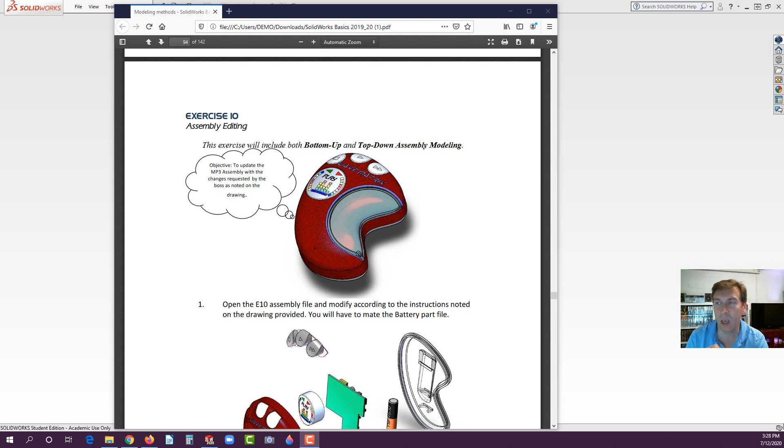All right, so we want to download this file, and where you would find it, just go ahead and go to Vertanu, V as in Victor, E-R, T as in Tom, A, N as in Nancy, U, X, and then 1.com.

And then you'll go to Part Files, and it's going to be the exercise 10 in the red column. The SolidWorks files are always in the red column. Click on exercise 10, and you hit download here.

If you're using a different browser, your download button might be up here. It depends on the browser, sometimes it gets positioned in different places. But anyhow, you want to download it. It's going to be a zip file compressed. So when it does open, you could open it with Windows Explorer, like in this case it's asking Windows Explorer. Sometimes if I'm in Google Chrome, you could just open it up inside the files there. Hit OK.

Now you have the ability to go to extract, or as I've shown you in other lessons, just select everything with Control A, hold Control and hit C to copy, and then create a new folder. Right click on Documents, New Folder. Let's get in there. There it is, New Folder. I'll click on it twice to rename it.

I'm going to label this E10. Actually, I'll drop it into my SolidWorks Basics folder because that's where I've been keeping a portfolio of things, and then just find the E10 folder. Actually, I already had one in there. You just right click on the folder and paste.

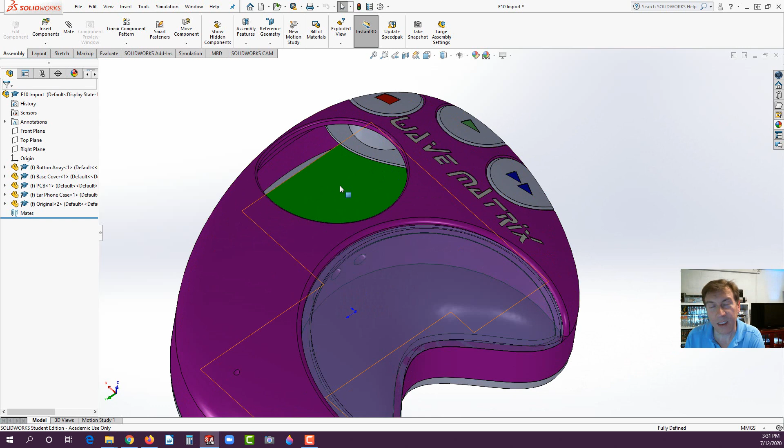Now I'm going to turn off my real view. What we see here is our MP3 player, and it's incomplete. Even though you look at it, it might seem complete, it's not. It's missing the LCD screen right here. It's also missing right here.

There's actually a hole for a post that would be in there that would create a hinge. And that hinge isn't capable just yet because we need the post, a little boss that's going to fit inside there.

Some of the other things, if we look inside, you're going to find other entities that we're going to have to address too. Now, this is actually spelled out in the training guide, so this is what you get. Now I'm going to go ahead and rotate this.

This is what we call in industry a red line and markup drawing. It's a drawing that basically goes through and the manager takes a Sharpie red marker, or a red pen, and circles areas, draws arrows, and tells you briefly what to do. So it's giving you your tasks.

Now it's up to you to funnel through those or filter through what you know you're capable of, and maybe saving the things you're not capable of for a little later on, depending upon how complex the model is. What I mean by that is what I was talking about earlier.

There's the AA battery. It just says mate a AA battery into the socket. Again, you could spend some time, interrupt your manager, say, hey, you know where that AA battery is? Do we have one on the file system? Or knowing it's a very simple part, you could just go ahead and model it up, finding one maybe sitting around somewhere in a radio or a clock, and pull it out and find a scale or calipers and measure it.

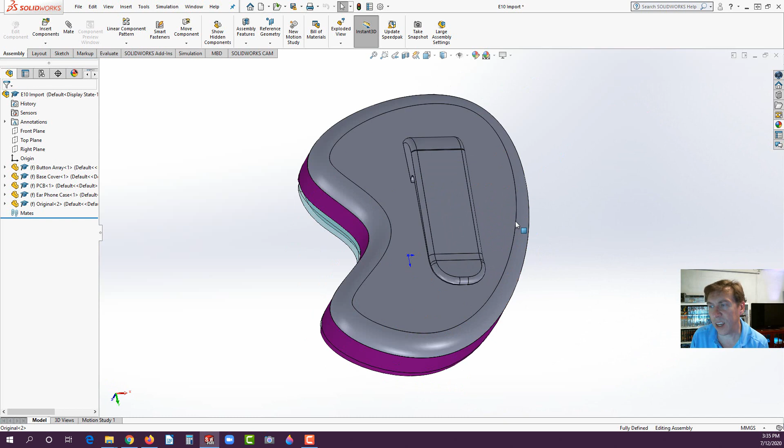Let's begin with the battery. What you want to do is rotate it around, click on this part and hide it. Now you can see there's our cradle right here, and some of the circuitry. This is not a real part, by the way, just a widget I threw together, so it wouldn't really look like this inside. It'd be much more simplistic.

Anyhow, what we're going to do is drop in the battery. If you go to Insert Component, we're going to find that E10 folder, and there should be a AA battery in there. Go ahead and open it up and get it close in proximity.

Now, this particular file has the origins turned on. That's what those blue things are. We don't really need to see those if you don't want to. Just go to View and Hide Show and turn off origins.

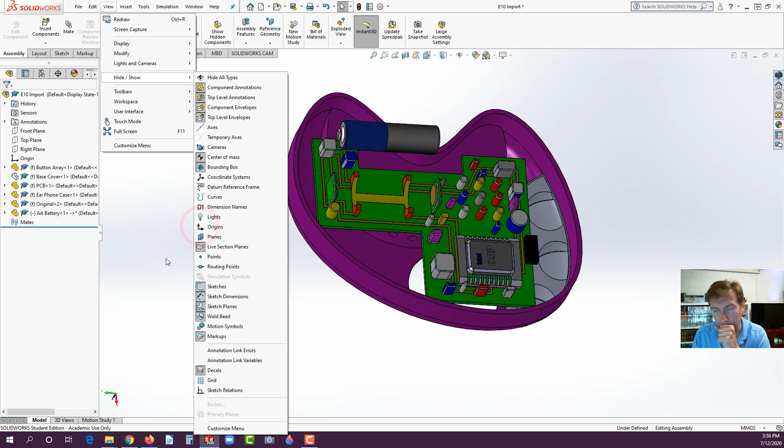Now we're going to go ahead and mate this. We've learned how to mate with the Alt key. So hold Alt, grab either this face or this face, drag it down to that yellow face there, and it should snap. Notice it's not exactly in place, but it is concentric.

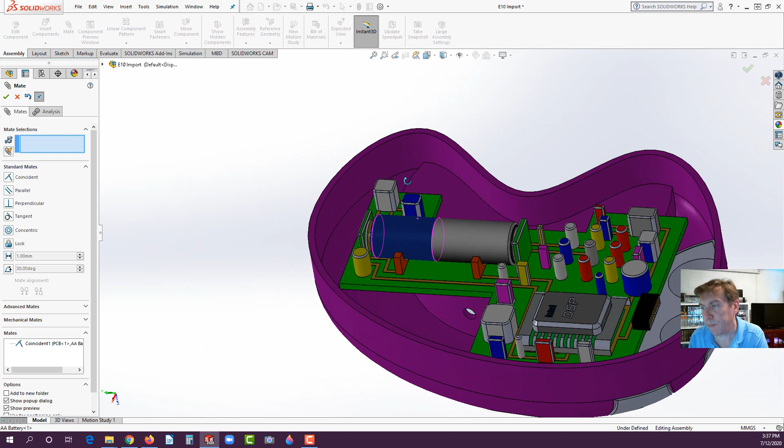Release the mouse button first, then release Alt and hit the green check. Now we want this backside face to contact the contact, so let's go to Mate. I already have that backside face selected. Go ahead and select this gold contact right here, and it should touch it. Now you could do the other side, either one's fine. So that's the battery.

Now let's flip this around and address putting in that boss. First of all, the battery—let's ask a question here. What do you think it is, bottom up or top down modeling that we just did there? We've talked about both over the past few weeks.

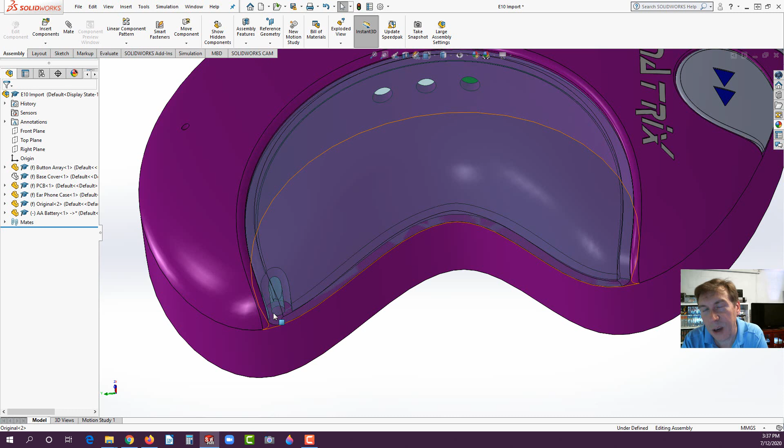If you guessed bottom up, you're correct. Bottom up is taking parts that are already existing and just dropping them in. So library parts, like nuts, bolts, washers—those are also library parts. So that would be bottom up modeling.

Now here's what we're going to be editing this part. This is really part editing inside the context of the assembly, but at the same time it is assembly modeling because we're going to base the location of our post centered on that hole so that it fits perfectly.

So here's what I want you to do. Now what we have to do is click on the purple part, and you want to go to Edit Part. You always have to do this, and we've learned that from exercise 9. So click on Edit Part, and now we're editing the purple part.

One defining entity is that the part you're editing on the feature tree always turns out the text in blue. So just be prepared to look for that. You can see it's called the original here, that is the front cover, and it's in blue. That's an indicator that that's the part we're editing.

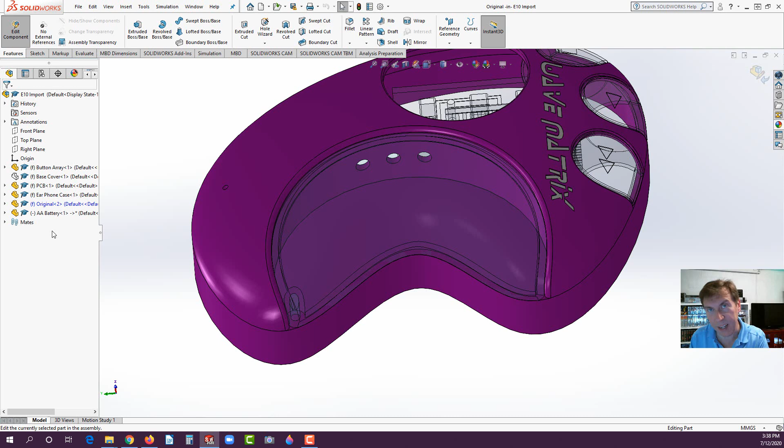All the other parts are not being edited, but we could steal information from them still. So let's go ahead and notice you can select through the part that's over it because it's transparent. Now start a sketch. Here, unfortunately, we can't select through it very easily.

So let's hit our space bar and go to the front view orientation, or just so it's aligned here, let's go to front, Control 1. Zoom up to that region, and now let's go to either wireframe or hidden lines visible. I like hidden lines visible. Now we can actually see that area there, and you're able to snap to it.

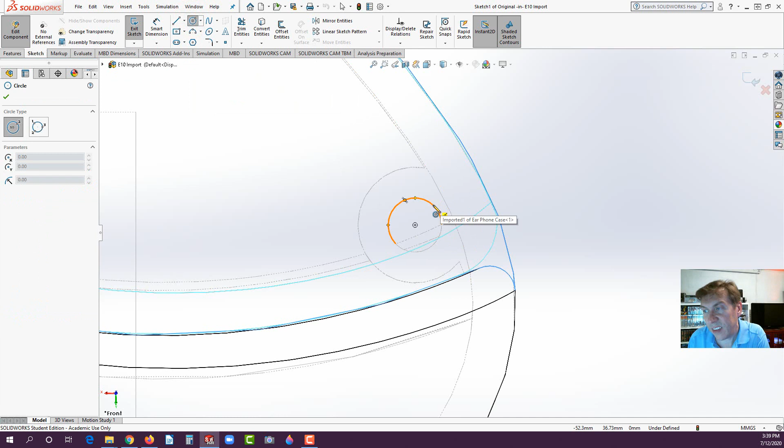So go to the circle tool and align to this. I'll hover over the edge, and then it locates the center. Click and drag out a smaller circle, and you'll notice we're in metric for this one. So go to Smart Dimension, and that's not a problem. In fact, when we add our dimensions, you'll see that it's ISO.

So technically, this assembly was not in the ANSI standard, which isn't a big deal. I'm going to show you some neat things. First of all, you could click over here to drop that.

If we're not sure, but we know what it's supposed to be for inches and not metric, you could type in what you know. So for example, 0.120, and hit the green check mark. Now it was supposed to be 120 thousandths of an inch, and you can see it's much smaller.

Double click on that again. Let's do something different: 0.120 IN, type in I for inches, N, hit enter. And it converted it to 3.05. So be aware that just typing IN, or even just the quote at the end, will actually convert it for you if you're in that specific units, the other units I should say.

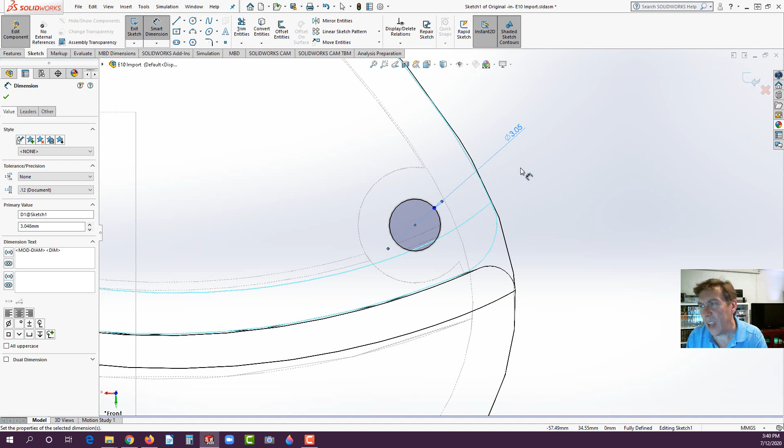Now at any time you could go over here where it says MMGS, click on it, and you could go to IPS. We don't want to do that, but we could, and it will convert over just fine.

Now be aware, those of you who worked on older systems had a tendency to rescale them. They actually come out to a different scale, and then you have to scale them yourself. SolidWorks actually does the conversion. So when you change it over, just like when we plugged in the number, it'll automatically make it the proper size. There's no scaling involved, so just be aware of that.

Okay, now we could go back to shaded with edges and rotate this a little bit, and let's go to Features, Extrude Boss Base. Now let's say 5 millimeters here, and we can see there's a bit of an intersection. That's okay. Technically, this would be designed better.

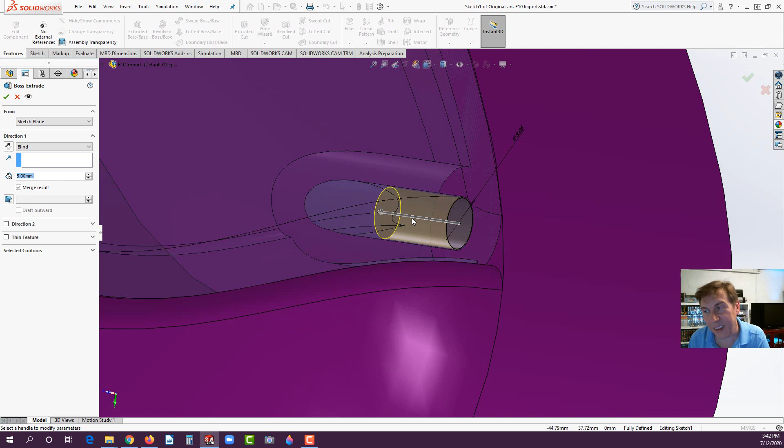It wouldn't have that strange little thing. The molding company would actually put a core pin that doesn't have that detail in there if you ask them to. So let's just pretend that squiggly area is not there. Hit the green check, and there it is.

We've just added a new post. Now when you're done, you have to turn off Edit Component. So make sure you go over here to Edit Component, turn it off, and it's no longer being edited.

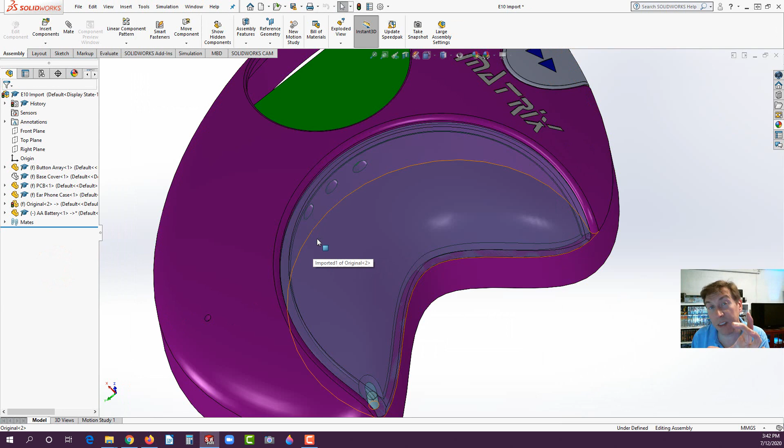All right, let's look at our instructions from our manager. So we've taken care of the AA battery. We've created the boss. Now let's hit the LCD screen. For the LCD screen, it needs to be roughly the same size as that opening, and it's going to be from the floor of the PC board, that green board there, and it needs to follow the contour of this purple exterior.

So to do this, here's what I want you to do: get it to where you can see inside there, rotate it similar to mine if you can. And now, underneath Insert Component, hit the little arrow and go to New Part. So here we are at Top-Down Assembly Modeling. Select New Part, click on the circuit board because it's flat - we can sketch on it.

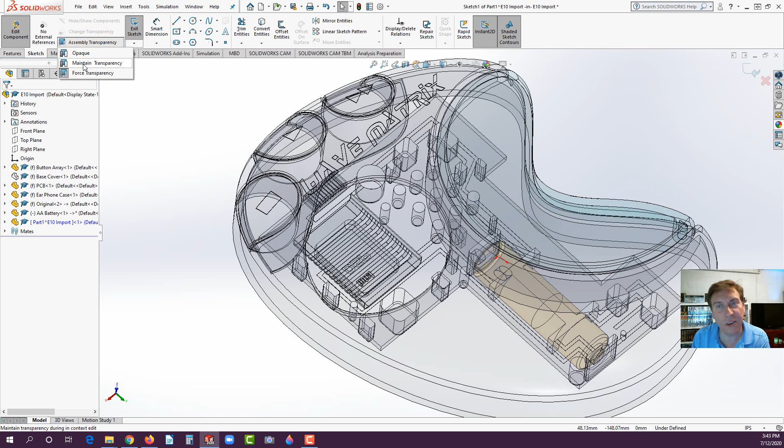And now it goes to this transparent mode, which when you're more fluent with the system, it's not so bad. But for new users, especially in the basics class, let's go to Assembly Transparency and turn on Maintain Transparency. Then rotate a little bit or zoom in and out for a quick second - it'll refresh the screen.

You'll notice there's an opaque assembly, and you're saying, well, why don't we use that opaque assembly that's over here? The reason I chose Maintain Assembly Transparency is because it's the best of both worlds. Notice right here, I'm able to keep this cover transparent, and everything else is opaque, i.e. solid, you can't see through it. If we went to that other option, it makes everything opaque, so you can't see through anything. So this is just kind of a nice little feature.

All right, now what we're going to do here is we want to create this part similar to how these parts were created, not in the context of the assembly - well, in the context of the assembly, but not integrated into it. We want to rename it, in other words.

Now, while the part is being edited, let's go to File, go to Save As, and it's just going to give a little message here. You could read it if you like, but watch this. Hit OK. And we're going to call it the LCD.

Let's copy over the old LCD. Or you could call it LCD1 if you want to keep that other one there. Hit Save - I'm going to replace it, yes. And notice it's now listed as LCD.

All right, so we changed it, and now that's a part floating outside of the assembly because we saved it like that. We did a Save As. Remember, we had to be in Edit Component in order to do that per part. So that could be a solution for some of you if you're wanting to change out parts, or add parts to it.

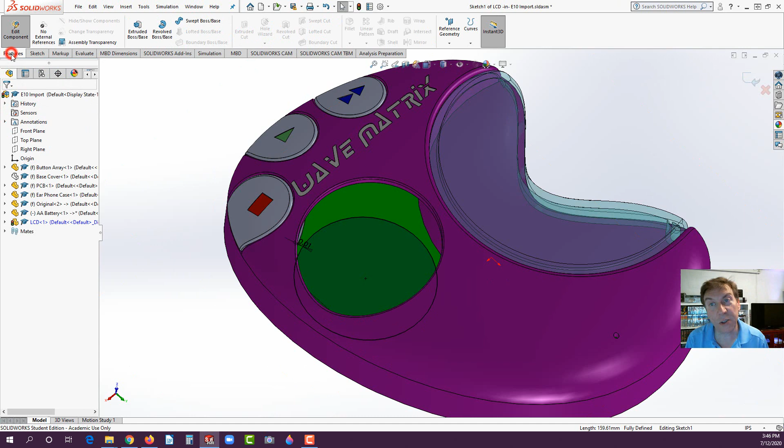Now let's go to Features and Extruded Boss Base. If you were to extrude this by grabbing the arrow and using the ruler, you'll see the preview shows it's not following the contour of the purple outside surface. We want this to be nice and smooth so if it brushes up against anything it doesn't get caught, and if you put it in your pocket it doesn't feel weird.

So now instead of blind, hit this little arrow to the right of blind and select up to surface. Now you just select the surface you want it to go up to right here, and you'll see it will actually show you a contoured surface that it's matched. Go ahead and hit the green check.

Let's put a fillet around that edge. So go to the fillet tool - or better yet, actually cancel, let's put a chamfer. Now when it comes to aesthetics of a model, a chamfer versus a fillet - if you're dealing with aesthetics, chamfers cast a greater shadow on something. It's kind of like actors - if you look at them up close versus when a play is being done, they put a lot of makeup on so you could see them from a distance, and a chamfer can kind of do that. Versus a fillet doesn't cast as great of a shadow. So just from a standpoint of industrial design, we'll go with chamfer in this case, and it's just a matter of taste.

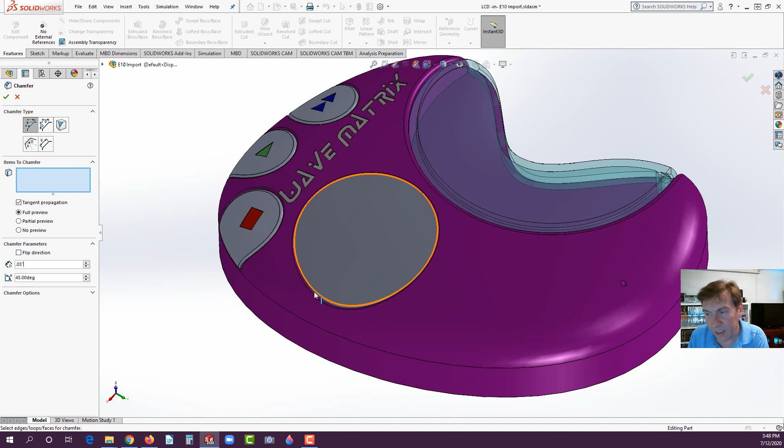Let's go ahead and set it to 0.03, and then inches. This time put the quote in just for the heck of it - the little quote, which is right next to the enter key, shift, and the little button to the left of the enter key. And select this edge, and you'll see the little break in the chamfer. Actually, in here you'll see it's 0.03. Let's increase that to 0.06.

Now here's what's interesting, and I just realized with the new part that I added - because of the way my computer system's set up, or my SolidWorks is set up, we're in inches now. Remember, we were just in metric. That's because the assembly, the imported models, were all set up in ISO standard and in metric, MMGS. New parts, it's not inclusive. If your system's set up for something different, you're going to get the opposite. And that's okay here - in this case, if we knew what it was in metric, we could type in something like 0.0 blah blah mm for millimeters, or 1 or 2 millimeters.

Okay, so hit the green check, and then we have our chamfer on there. Okay, let's turn off editing that component, so don't forget to turn that off.

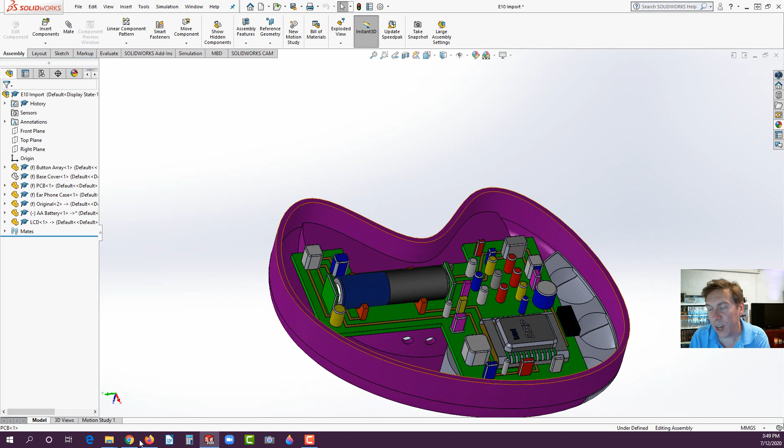All right, now we're getting here. The next thing is to work on that rear cover. So we need to bring that back. Find the base cover, click on it, and click on the big eyeball to show component.

Let's hide the purple part. Click on the purple part now and click on the eyeball with the line through it to hide it. We'll leave these other parts in here and work around them.

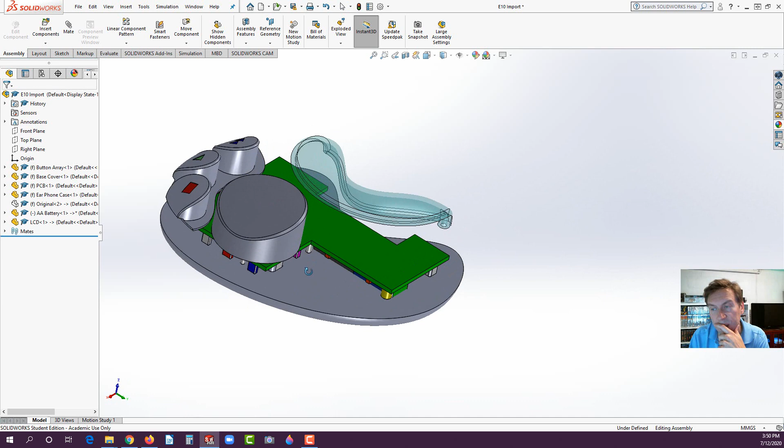For this next one, let's go ahead and select this face. And we want to go to Edit Part, letting SolidWorks know, hey, we're checking this part out. Let's work on it. So click on it.

The first thing the boss asked us to do was to put in a wall here, or a thin wall, and it's 100 thousandths shell, so 0.1. Now we have to make sure down in the lower right, you'll see it's in MMGS. If you like, we could hit the little arrow and change it to IPS.

Now when we go to our shell tool, sometimes you'll see, because the assembly is still in metric, this is only adjusting the part we're editing. So we've converted that part to inches, but the assembly is still in metric. And so you might see a discombobulation - you might have the two systems. At some point you might see metric, at some point you might see inches, just like we saw earlier.

But let's see what it gives us. Go to shell, and we're in inches. Okay, and 0.1 is what we want. Click on this face and hit the green check.

Now here you get a message, and this is actually common: the thickness value is greater than the minimum radius of curvature. The shell may succeed, but could cause undesirable results such as bad geometry. It's basically saying it's probably going to work, but there might be bad geometry.

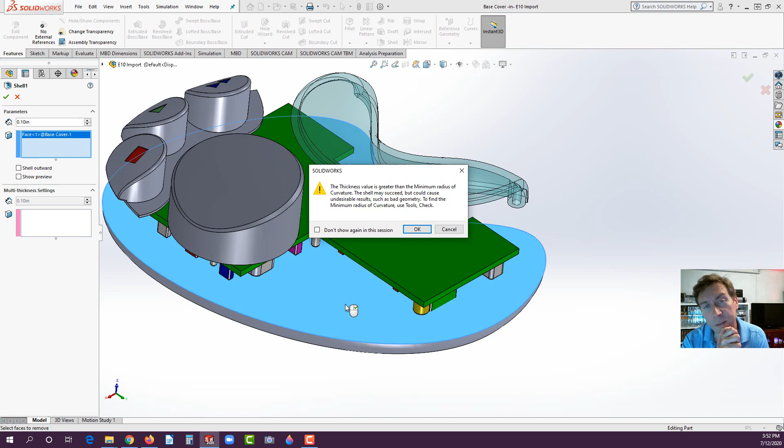I used to get these a lot when I worked in industry. I worked in the mold industry for a little bit, and actually the prototyping industry, so I have a bit of experience in this field. But if we could fix it, that would be much better. So let's go ahead and just hit OK and let it do its job.

But let's take this out of the assembly so we could look at it without all this stuff around it. What you can do for that is right-click on the actual part, either in the feature tree or right here. In the quick launch toolbars, the very first tool will be Open Part. Go ahead and select it.

Now you might get this message: do you want to proceed with feature recognition? This is because this will usually happen if it's an imported model that may not be native to the software. We're going to hit no.

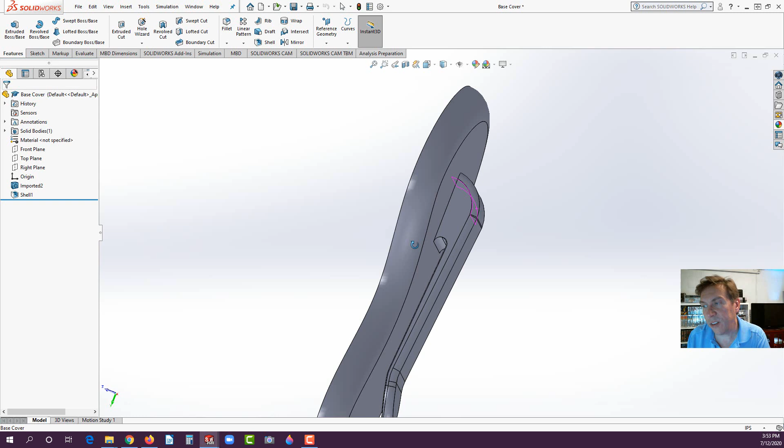All right, and so we could see here, now there are tools for checking them and things like that. If we go to imported, since it has a shell, we can't do it unfortunately. But if we left pre-shell, there's actually a little toolbox that allows us to work on it. There are other tools that we could look at it, but I'll tell you right now, usually the part looks actually quite good - look for entities like this.

So what we have here, if we select that side face, when we shelled this out, the belt hook had an issue. This has some series of fillets, and the minimum radius curvature was lost, maybe perhaps even at this point. And so it might create bad geometry for mold making.

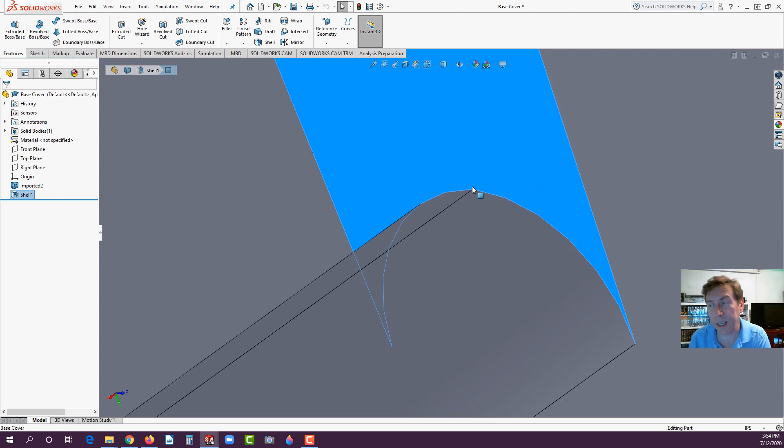And in fact, actually, it's bad geometry for mold making anyhow, because it's an undercut. Mold, typically the most basic of molds are two-part - they have one half here, and they split. And notice this hooks over - the mold couldn't split very easily there.

Now, there are ways of getting around that if you have to have it like that, but clearly we don't need it like that. Meaning, we could basically fill it in if we wanted to.

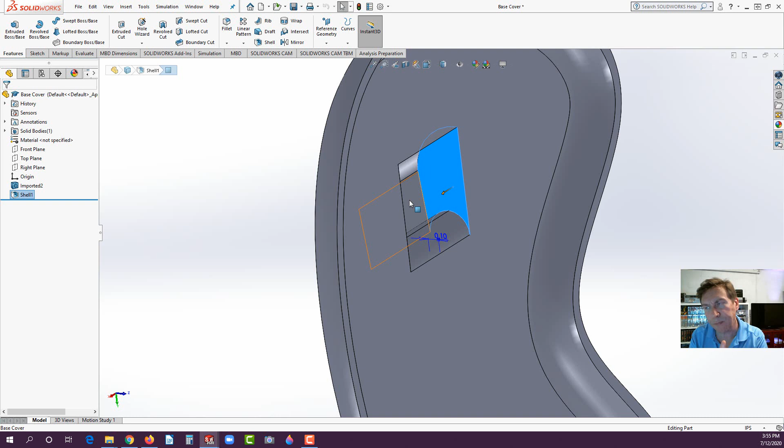However, filling it in isn't always a good thing either, because when you fill in - and now we're talking about plastics engineering and design - that thick of a piece of plastic, you'll get sink marks. It'll actually sink in because it solidifies, and the more material that you have, it sinks in even worse. You might not want that. We don't want the part to be warped because it's sinking in. So you want to keep what they call a core inside there to keep the walls thin to prevent the shrinkage from occurring.

So here's what we're going to do. Select this side face, start a sketch, and hit Convert Entities. That projects all the edges on the inside there to sketch geometry, as you can see here.

Now take the line tool and click in here and draw a little box like this, having some geometry similar to what I have. So I'm going to go ahead and dimension this.

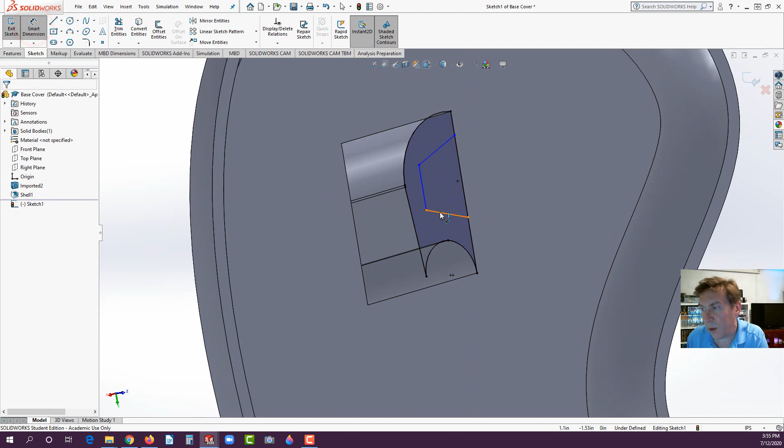Let's see here, we'll have it go in 0.3. And then we're going to go ahead and add an angle here.

I accidentally selected the point, so I'm going to cancel that. Let's go with 120 degrees here and 120 here. What I would normally do is put draft on using angles, but we'll just do it this way so it's easy to see, and add some dimensions here.

And then the bottom here, we'll go ahead and make that 0.125. Then position this endpoint to this edge right here, or that point, and make that 0.14. That's to locate it.

Okay, now we want to cut this little segment out of here. And by the way, these numbers I'm just coming up with off the top of my head. In reality, I would think them through a little bit more than this.

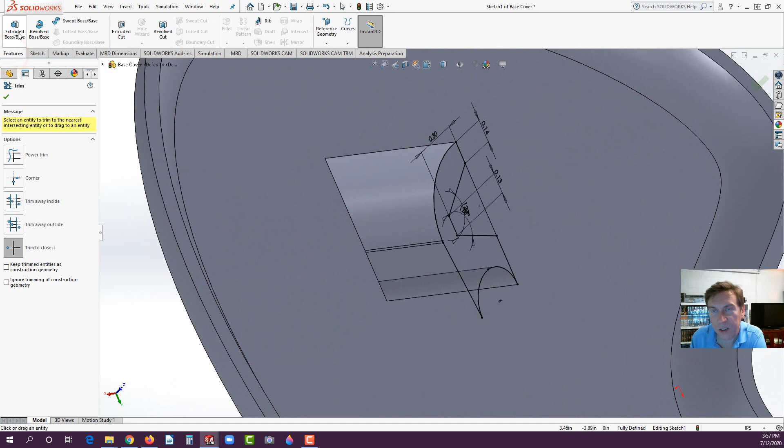Okay, so now we've opened up that little segment right there. I went to Trim, closest, to open that up. Now when we go to Features, Extrude Boss Base, we'll select this corner to go up to, hit the green check, and now we have our core in there.

We could put draft on the sides too, which you'd probably be required to so the core can pull out easier. Not all the time though - plastics sometimes are a bit more forgiving, but in a case like this...

All right, so we have it shelled out, and we have our core in there. It probably fixed any sort of issues there might have been in that little undercut area, and it will pull from the mold easier too.

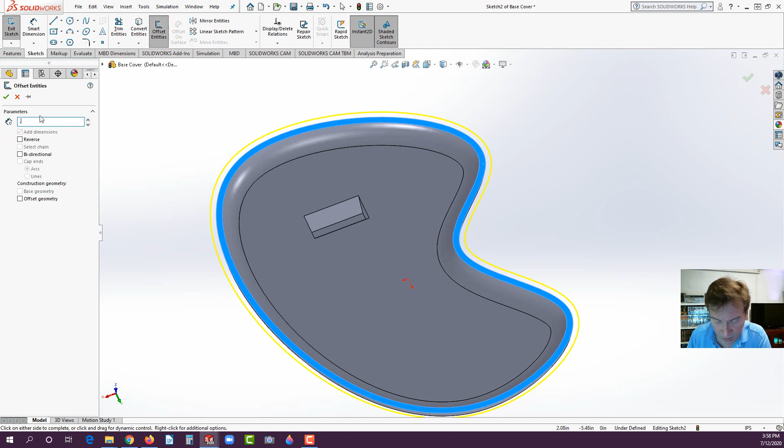Now select this face and start a sketch. We're going to use Offset Entities, 0.05, hit reverse to get it on the inside there. Then select this inner edge and hit Convert Entities.

Now, I know I showed you a trick where I didn't convert that inside edge, and that works great for linear geometry. Sometimes with spline geometry, which is a little more freeform, I've seen some strange phenomena occur. So I'm going to close this gap - that's why we have those two in there.

Now go to Features, Extrude Boss Base, and we want to extrude this 0.1 in height. We could also turn the draft on too if we just set it to 1 degree. Now, if you see that it fails to show a preview, that might be an issue.

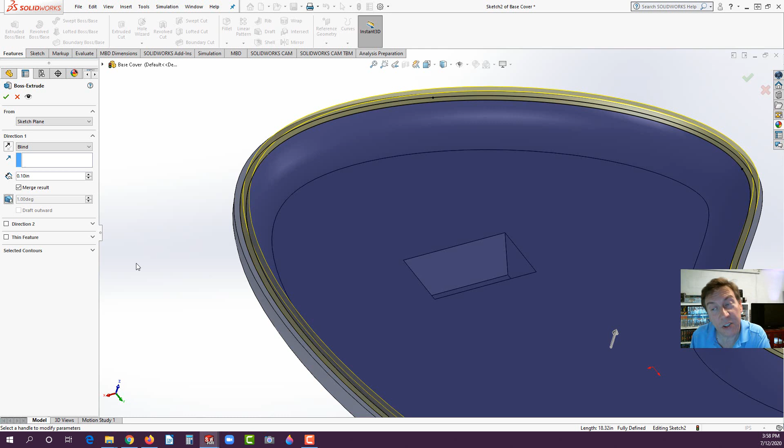So turn it off again. Yep, when we turn it on, we seem to have a bit of an issue, so we're going to leave it off. You could add it later with the draft tool. So hit the green check, and now we have our lip in there.

Now to add it later, there's a draft tool right here - we'd be able to select the faces. Let's see if it works. Go to Draft, go to the Manual.

The Draft Expert's very nice, but in this case it's such a simple little area, I'm going to go to Manual. Neutral Plane, select this surface here. And then for Faces to Draft, we'll select this surface right here and this surface here.

And make sure we see the preview of the arrow. Let's see - there it is, I had to zoom out. It's way back here. As long as it's pointing outward, we're in good shape. Let's hit the green check.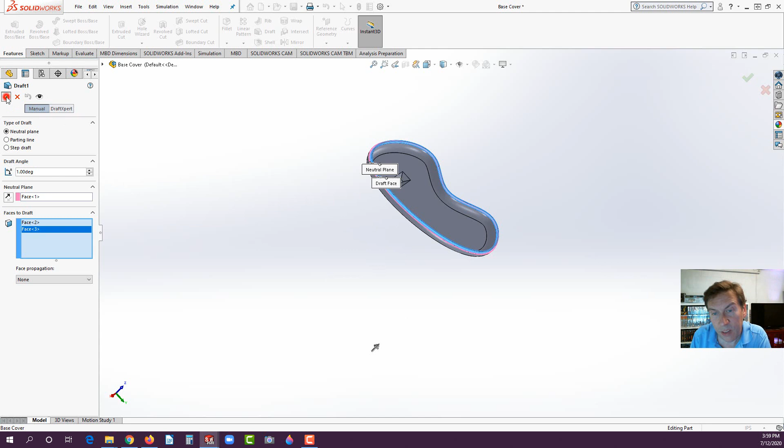And now it should have added draft. Now, if we want to check, you could click on draft up here - I'm sorry, hit cancel there. You could go to Evaluate, and there's actually Draft Analysis. This is very useful for mold makers because they have to make sure there's draft on most every face so it pulls out of the mold properly.

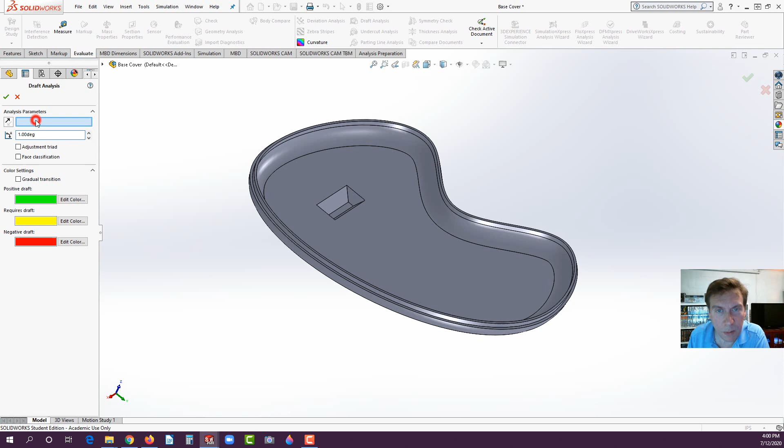And here we have draft analysis parameters. Let's turn it up to 1. We didn't put much draft on here. Select this face.

Green is positive draft, that's good, and we have a lot of green. Yellow requires draft, so if we wanted to, we'd need to put draft on those faces, and it calls that out on us. Red is negative draft, but don't panic, that's not a bad thing as long as it's on the opposite side. Here you can see those faces need draft too, but we're not going to put that on.

You just saw a method of putting draft in. We know two methods now while you extrude, and sometimes it doesn't work, especially with a spline contour like that. Sometimes we have some issues, so you could add it later on. Anyhow, this isn't a draft mold class, but just wanted to talk about that.

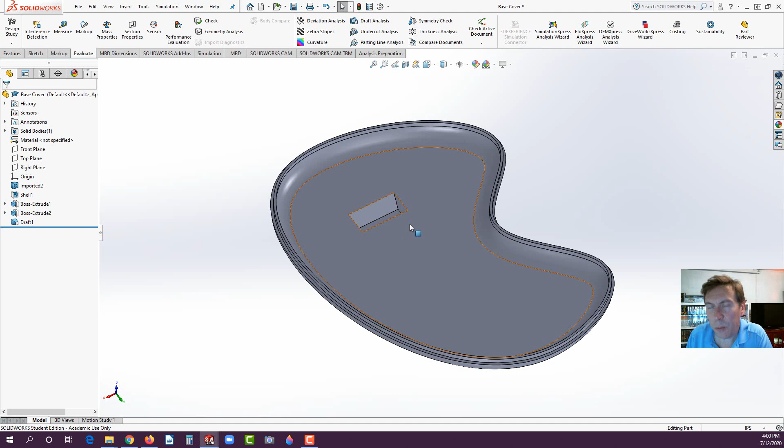All right, so now we're going to go ahead and go back to the assembly. To go back, first save this part and hold Control and hit the Tab key one time, then release it. It should bring you back to the assembly. It wants to update it, so just go ahead and hit yes, and now it has the changes we've made to it.

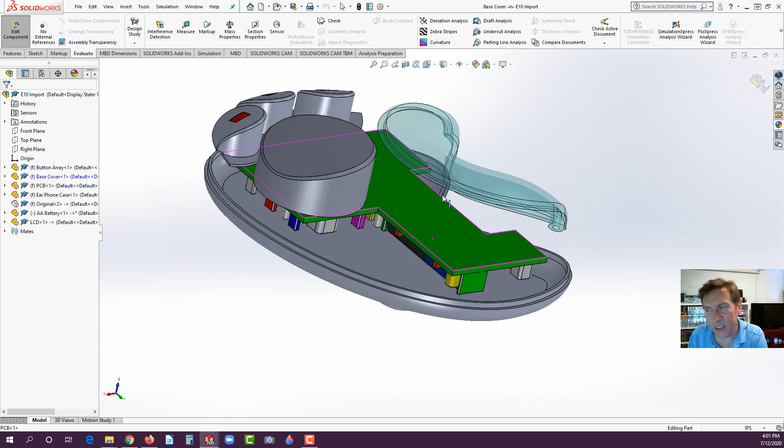The next thing we want to do is get the battery cradle. See here, these red surfaces are the battery cradle that are attached to the circuit board. We want to mimic that on the side of our cover so that the battery is held in place securely. Notice there's not many sharp edges on the actual rear cover to make dimensions to, so this is where top-down assembly modeling shows you its magic ability.

What we're going to do is select the floor of that shelled out part there and start a sketch. Now I'm going to hit the space bar and go to front view orientation, then proceed to hidden lines removed, and zoom up. Here at the bottom, it's somewhat hard to see. Maybe if we go to wireframe we might see it better. Maybe not, let's go back.

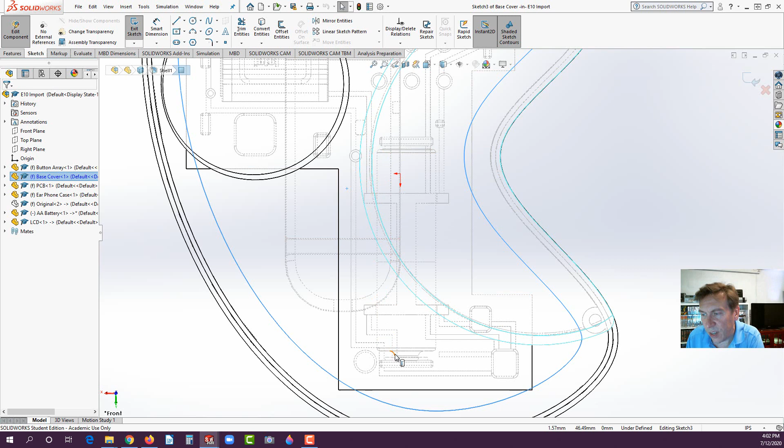Okay, what we're seeing here is the battery, the edge of the battery, and there you can actually see the tip of the battery. So it's going around here. Now that little shape that looks like the Roman numeral one, or the letter capital I, is the battery cradle. We want to capture the two ribs here and here.

Now here's how to do that. Click on the little arrow to the right of your rectangle tool, find corner rectangle. Hover over this corner right here when you get the orange dot. You have to look carefully, I'll hold it there for a second, you can pause if you need to look at it. Click, drag across to this point here where it ends.

Click, same over here, find the orange dot there. Click, and over here, click, and then hit escape. Didn't even have to use any dimensions, we just actually drew right over the geometry and it's tied to it. Now if you rotate, you can see in there, and in fact we should probably go to shade with edges now, and you can see our patterns at the bottom.

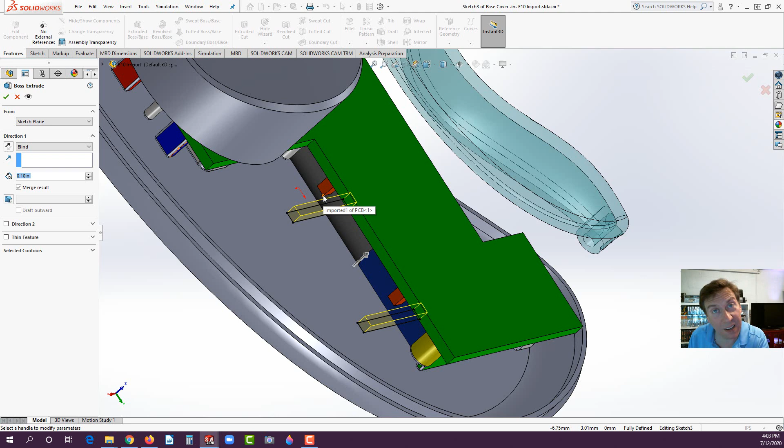They're ready to extrude. So go to Features, Extrude Boss Base, and we could just click on this vertex of the red cradle that's mounted on the circuit board for it to go up to. Now, some of you might say, couldn't you have selected up to next? Up to next wouldn't have been an option because up to next only looks at its own volume. This is a separate volume, so it wouldn't see it, it'd be blind to it.

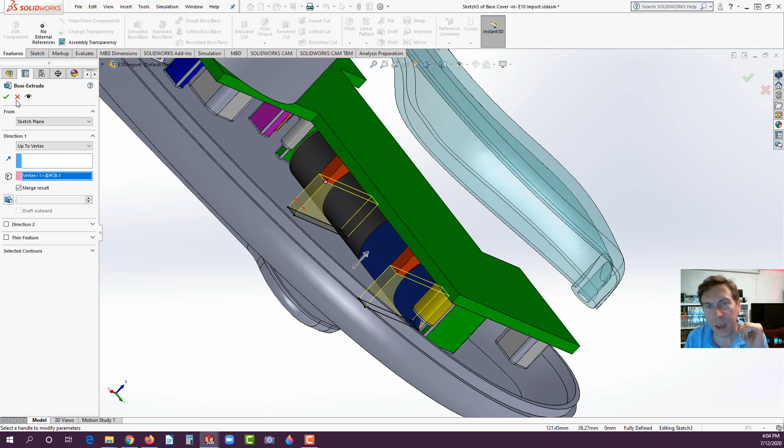Hit the green check. Now we need to make the cutout, a scallop cutout for the actual battery, the half round. So select this face here, and I'll zoom out so you can see that. There's the battery, click right here.

You're going to start a sketch, and now hit your space bar and go to the bottom view orientation, and there we could actually see the battery. Now go to sketch, go to the circle, and hover over this edge. I think it's going to make us actually... although there it goes. I hover over the edge, and there's the center point.

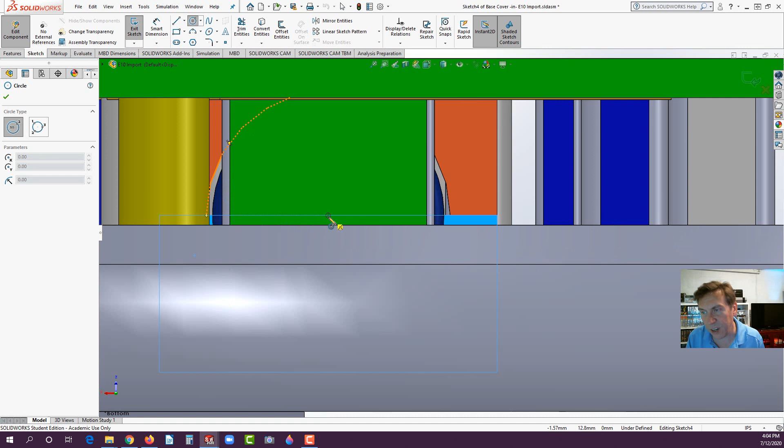Now I could click on that center point, drag it out to this red corner right here, where the red corner meets our rib that we made. Click, and notice it's a little bit bigger than the battery. There's the battery, we have some clearance. Remember, with batteries, they can vary, especially with temperature. If the batteries get really hot, heat expands, so you want to have some decent clearance for that battery.

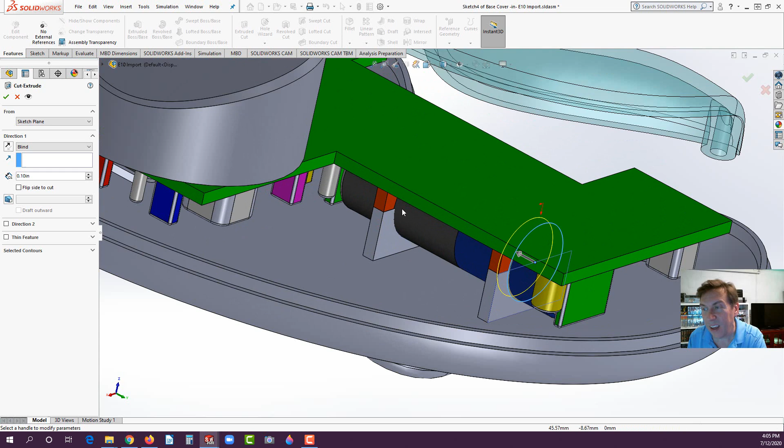And now we could go to Features, Extruded Cut. And here's where I get a lot of students who select the wrong side. They select this corner. Remember, you wanted to go all the way through, but not all the way through the other side. So find the far end, the furthest red little marker there, click, and hit the green check. Now we should be able to, if we hold Ctrl and hit Tab, it should bring us back to our part.

And look at that. We have our 2 ribs completed. And notice we hardly had to use any measuring. We used all the tools like up to vertex. We used the profiles we just sketched out. And this is extremely accurate up to 8 decimal places. So just be aware, it's a great technique.

Top-down assembly modeling. You're looking at the strengths right now very quickly. We didn't have to take any measurements. Just put them right in.

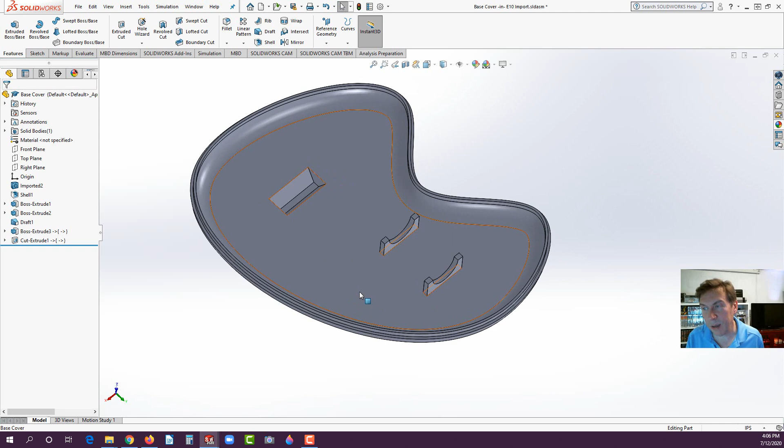Now hold Control and hit the Tab key. And from here, we're going to go ahead and bring back, actually we could turn off Edit Component because we're done with that rear part. And then click on Original and go to Show Component.

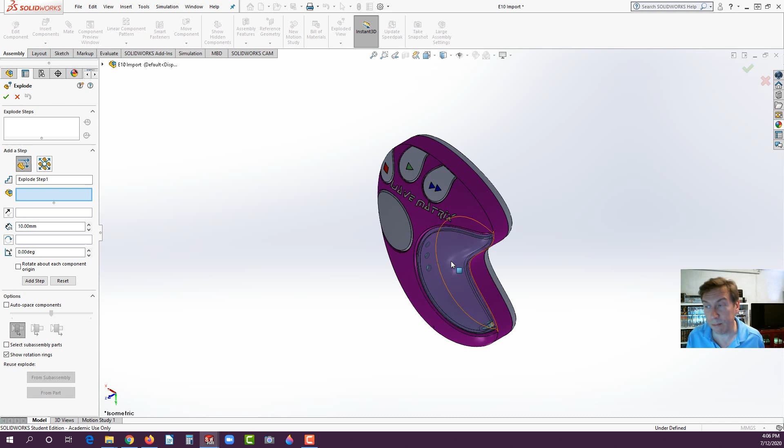Let's hit our spacebar and go to Isometric. And let's explode it now. So go to Exploded View. Select, let's see, we want to select this transparent part. Does anyone remember how to select it? Notice it's selecting through it. And we learned this a couple weeks ago. There's a key on the keyboard that allows you to select transparent objects. It's the Shift key. So hover over it again, click, and now that's selected.

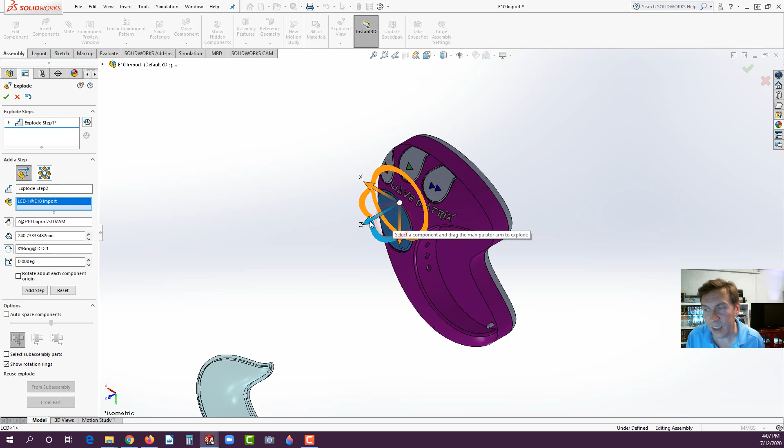Now you can release the Shift key, get over the Z arrow, make sure that Z arrow turns blue, hold your mouse button down and drag it forward. And we're metric, so we'll bring it about 230 millimeters out, approximately. Then hit Done. Now you could click on this, which is the LCD, get the Z to turn blue, the Z arrow, and drag that out.

You could drag it out a little bit further, maybe 270. And remember, you can zoom out if you need more room. Hit Done.

Now let's go ahead and click on the purple part. Grab the Z, drag it forward about 100. Hit Done. And we'll start to drag these parts backwards. So click on the rear cover, go to the Z, drag it back about probably 250-ish around there.

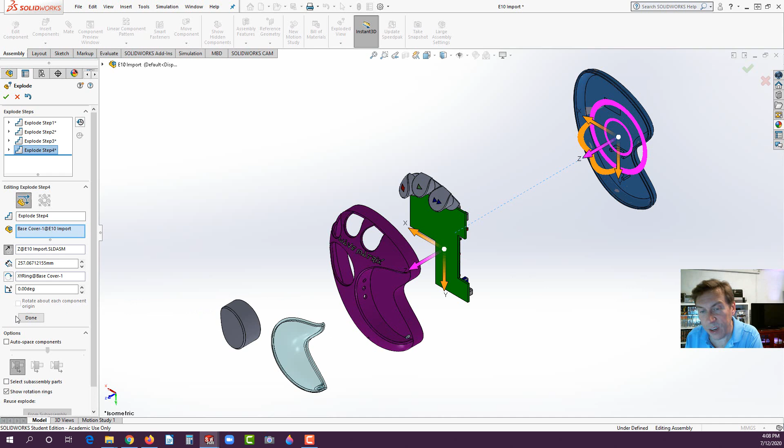And now you know we have a battery in there, so you could rotate, hit Done, and rotate around and then see that battery, click on the battery and go to Z, drag it. And then you could also go to Y. And let's say we want to drag it down or up.

Okay, in this case, it did something I wasn't expecting. So I'm going to hit the undo button. I'm going to hit Done, click on the battery again, and drag it down. Now, do we really want it there? Not really. I just wanted to show you how you could drag it in different axes.

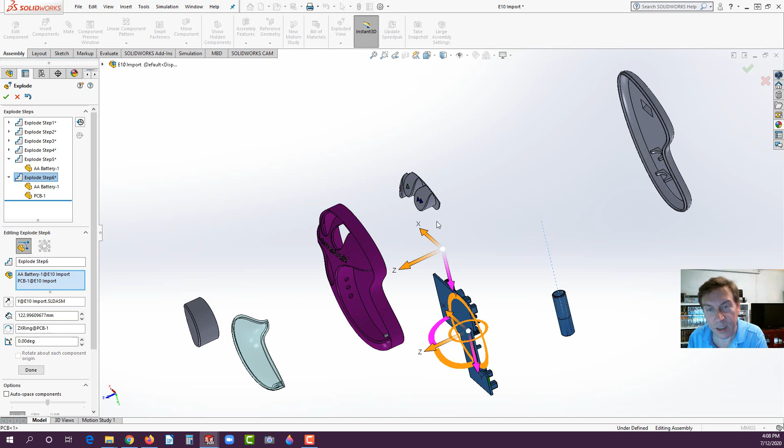All right, now grab the circuit board, click, and now look what it did there. It moved that as well because we never hit the Done. So let's hit Undo, hit Done, and now we can move that. Drag that this way. And what we're going to do here is once you got that, go ahead and grab this right here.

And we could drag that around. Actually, we probably have to hit Done again. Let's hit Done, click on it, grab this little arrow and drag it around so that we could flip it so we can see the circuit board.

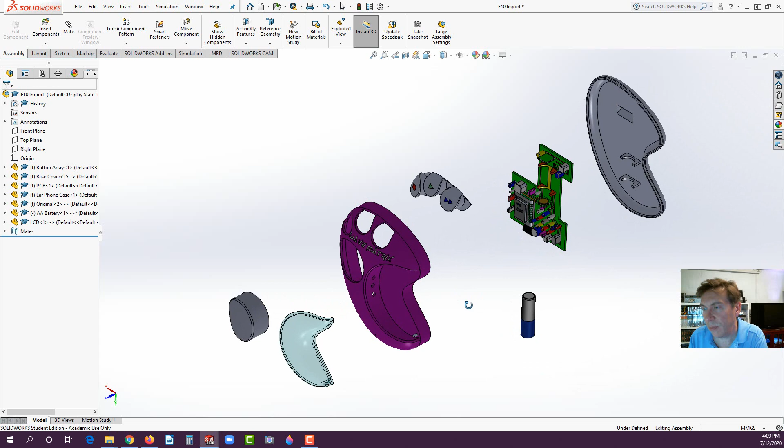Now in real life, would we do that? Probably not, only to show the circuit board there. But hit the green check. Okay, so now we could see the assembly.

And let's go underneath Exploded View. Let's go to Exploded Line Sketch. And what we can do for this, let's see. If you don't have a nice cylinder or an edge, like we do have edges here, but here we could actually select maybe this and have that go to this. And notice it kind of zigzagged around. This isn't the best example since I flipped around the circuit board, sadly. But hit the green check and you get the idea. So if you need to make additional entities like that, it's just selecting the edges.

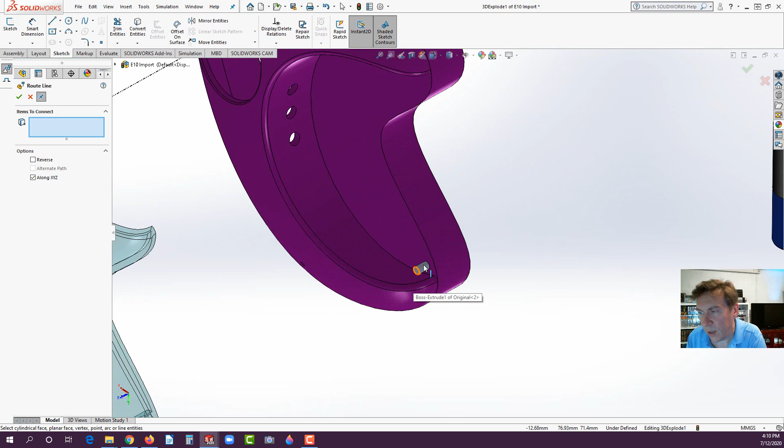Like actually we could add one over here. Select this and then go ahead and probably have to get around to the back side. Select that edge right there. There we go. All right. That's pretty good. Hit the green check.

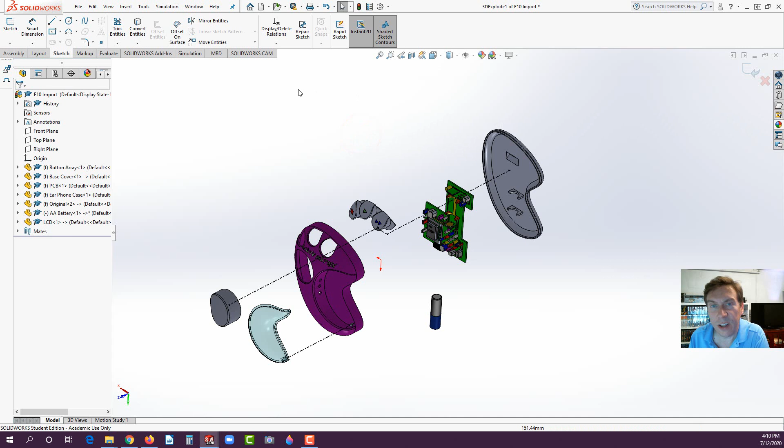And now let's collapse it. So to collapse it, right click up here, hit collapse. Now there is actually animate collapse too. If you go ahead and try animate collapse and you'll get to see it reassemble. So if you hit reciprocate and there's playback mode of half that speed or twice that speed, hit play again and you'll see it will go back and forth. You can slow it down to half speed.

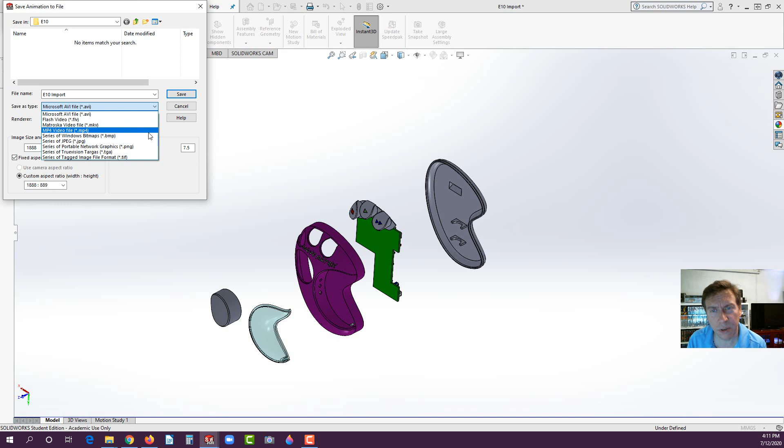And then you could record it. You could hit save animation. And if you save the animation, you could select a series of different formats, there's flash video, Matroska video, so there's a number of options. I'm not sure if you have all those, but I'm going to hit cancel here. Just note you have those options.

Okay, so we're done with that. Now the lab that's in the training guide, if you look on page, let's see here, we're on 96, and I rotated it. Remember, if you download it, then you click on it, you usually right-click and you'll find rotate, or in this case in Firefox, rotate is just right over here. Depends on what browser you're looking at, you might get the option to rotate.

And we can see here, this is a cylindrical part, and the tricky part here is the sketch. Now, I'm not going to go through every single dimension. I actually did give you duplicate dimensions because it depends on the way you draw it, it might come out a little different in terms of which dimensions you add versus a relation or constraint. Let's zoom up a little bit here.

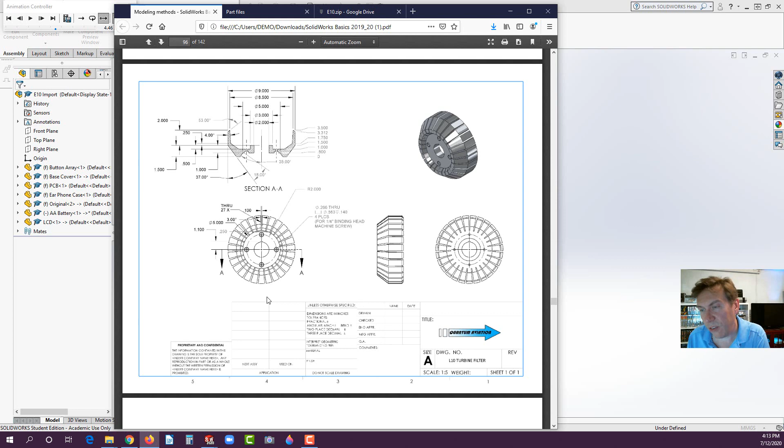This is what's called a fictitious part. It's a turbine filter, and so these are basic little vanes that are here that we're going to cut out last. Notice there's a hole that's patterned here.

And whenever you see this in parentheses, like for a 1/4 inch binding head machine screw, that means you don't have to plug in all those numbers. You could actually go to the hole wizard, which we learned in exercise 4, and find a 1/4 inch binding head machine screw counterbore and put it in, and it'll find it from a library. So you don't have to put all those details in, and it'll put it in exactly like you see it there. So be aware that's a nice feature.

Okay, but we have here, it's 9 inches overall. I have a cross section through it, and there's these details. Now be careful with the details. The holes or the counterbores, remember, you don't draw those in. Those are going to be put in last.

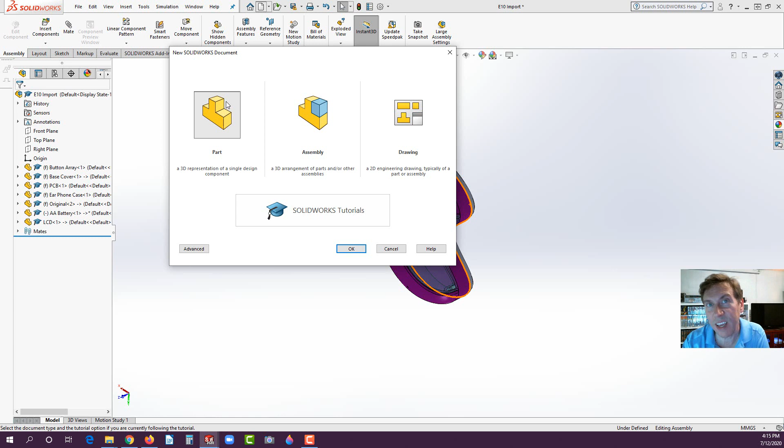So let me show you a technique here. And I'm not going to put in all those dimensions because I want you to do it. Right now we're already near the end of the semester, and I'm going to give you little tidbits on how to get it if you get stuck. But at this point, I expect you to be doing these on your own. And as I always say, when you get a job doing this, there ought not to be any surprises that there's not going to be a video to show you how to do your job. So that's why I insist that you learn to do these on your own.

All right, I'm going to start with the front plane, start a sketch. I'm going to go to the centerline tool, draw that up. And I'm going to draw a line across here just for scale, because if you remember, it's 9 inches across, so about 4.5 inches, that would bring us to four and a half. And that vertical center line is there because we need to revolve it.

Okay, now you have to look very carefully at these models or these drawings. And as you can see here, we have a hole that's 2 inches, and so that's going to be 1 inch off of there. It's off of the bottom edge, positioned at a 1/2 inch. And then the overall thickness here is going to be 1.5.

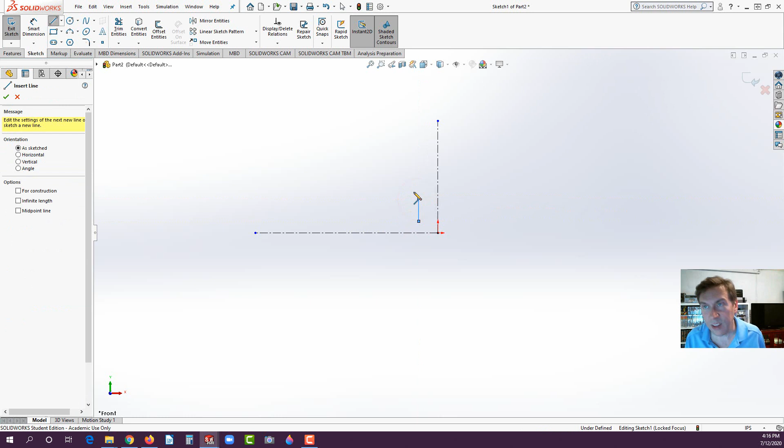So we could actually draw that in, something like this. Let's put some dimensions again to give a scale. The hole is going to be 2 inches, so we'll get that in. And then from here to the base, it's going to be 0.5. Let's hit escape.

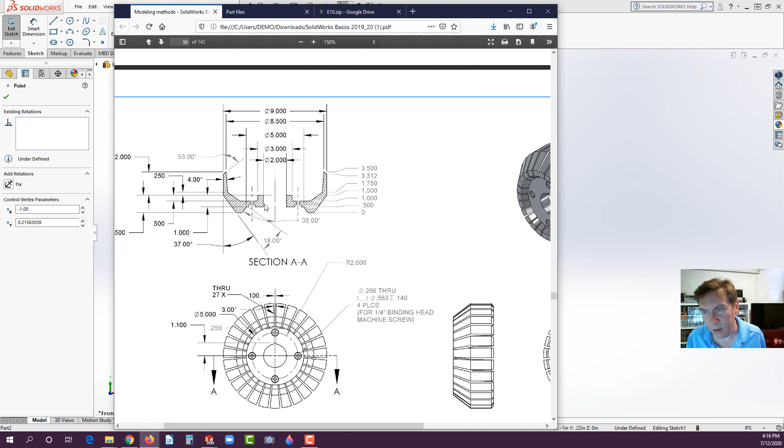And I might actually have that wrong. Let me go back to that drawing. Oh no, I'm sorry, I have that wrong. It's actually 1.5. All right, I was wondering why it's turned out so small.

And one last thing there, it's going to be 1 inch, it's going to be 1/2 inch off the base. So by putting this in, this little bit of work is going to make your life a lot easier when you're drawing this out. So let's get that way over there. Okay, so we have that now.

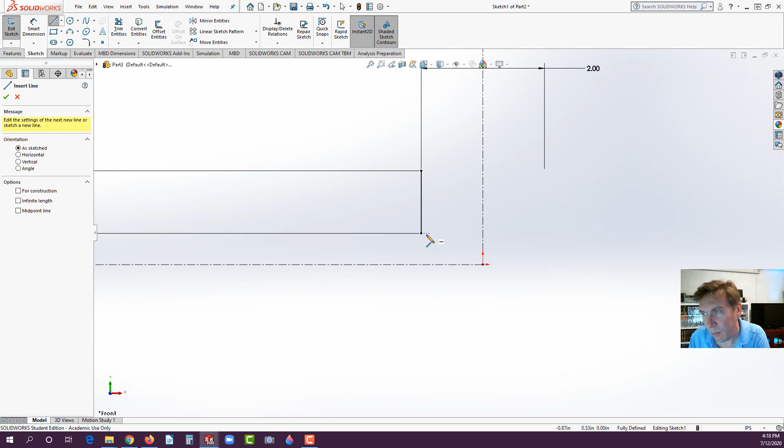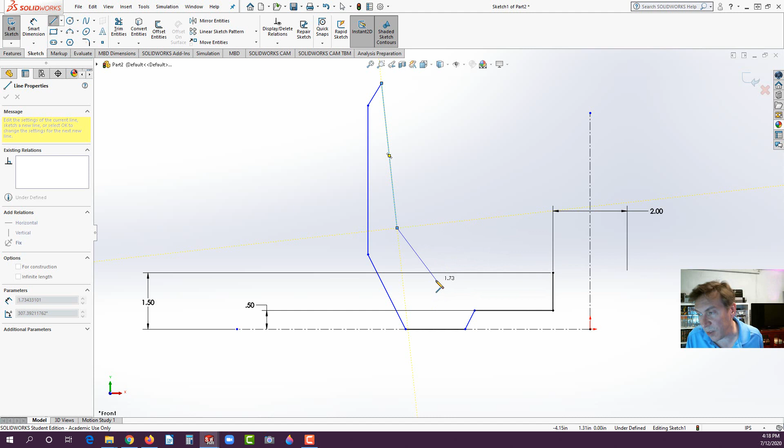Now, if you don't want to accidentally get an angle, remember the trick is the Control key will disable auto snap, just for a moment. And then there's about 4 degrees of draft here. And then we've got this. Again, I'm going to use the Control to disable the snaps. Going to go across here, up, and we do actually want to snap to that.

There we go. And let's get that stretched out there. So the Smart Dimension, get this to here. That's supposed to be 9. Now it's going to jazz up our geometry a little bit.

But if I hit escape, I can bring this back down. There we go. And then we know this is going to be 4 degrees. And this is from here to here. I believe that was 52 or 53. Let's go check that out. 53.

And this is 18 degrees from here to here. Make sure you get it in the little areas that I'm showing you here. If you drag it out here, you're going to get the opposite. So be aware of that.

Okay, and then we have 35 degrees for this angle to the center line. And I'll straighten these out in a little bit. Let's see what else we got here. 35. I think we're in pretty good shape.

Now we just have to put some additional dimensions. We could see this needs to be 1.5 off that base. So from here to the center line, that needs to be 1.5.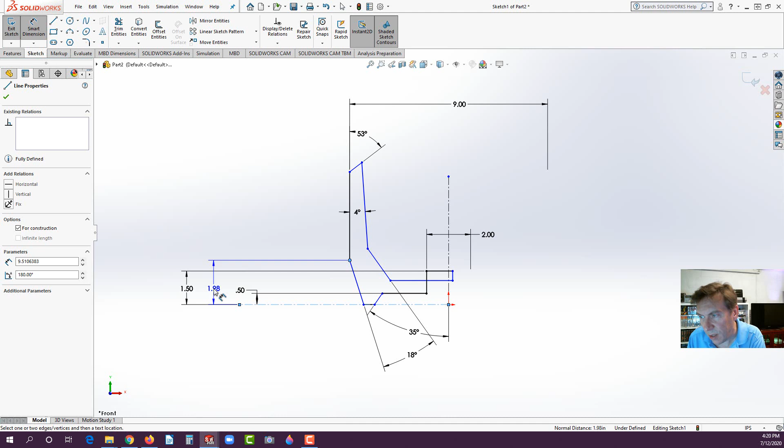Or we could mate it instead of having dual dimensions like that. Oh, here it slipped out of there. We just hit escape, I drag it over. And there are some dimensions here. Let's see, that bottom line is a 1 inch.

Okay. And notice the colors are changing. They're turning black, and black is good. That means it's fully defined. The blue is what we still have to define.

And okay, now we need to get that corner, which is right here. Follow that up, that's going to be 5 inches. This is 3 inches off of here. So let's start work our way from the inside out. So from here to here, remember, cross the center line to the right, make that 3. This point to the center line, cross the center line on the right, it's going to be 5.

And then we have 8.5 for that point. So from here to here, this will be 8.5 to the center line. And we have the 9 already in there. And let's get these aligned here, get them out of the way.

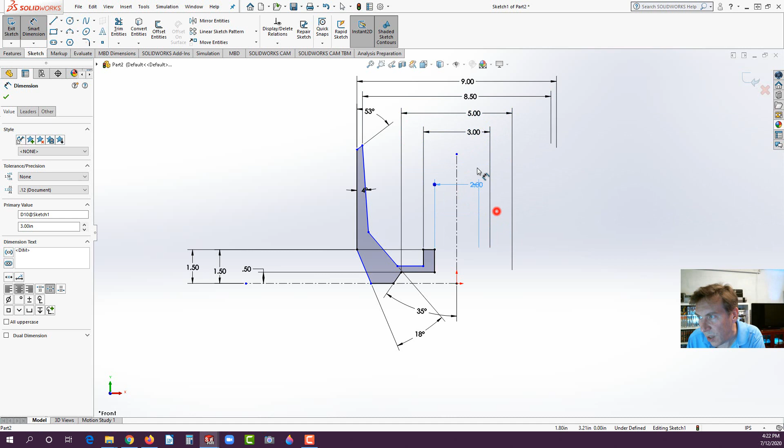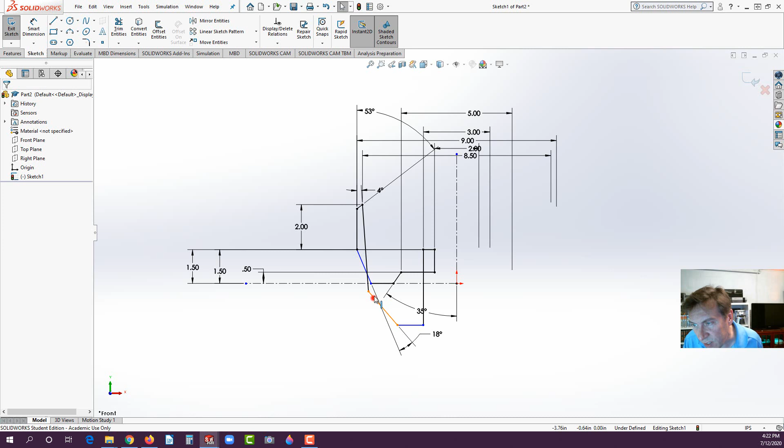Okay, now the height, we have a 2-inch from this face here to the top of that. So from here to this face will be 2 inches. Okay, and again, we have it get thrown off a little bit, hit escape. You could hit undo if you wanted to constrain this in a different manner, but this should take care of it. You could just drag things around and get them relocated until we get more dimensions on.

Oh, we have a 37-degree angle there. Do I have that? No, I don't. So let's put that angle in. So from here to here, that's 37.

Okay, we only have 2 blue lines left. Let's see what we need for those. This should be 1 inch off of this face here. Okay, 1 left, just that one right there. That's blue, and what are we missing?

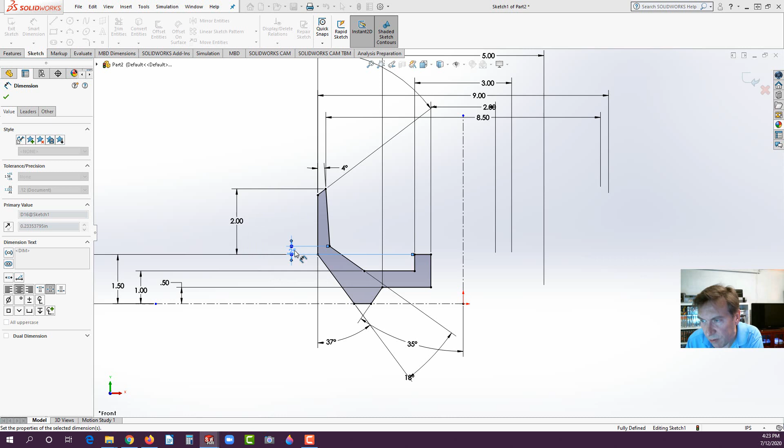You see the corner is 1.75, or here, yeah, we actually have that dimension if we follow it. 0.25 off of that face. So from here to here, 0.25. Now it's fully defined.

So this is where I would recommend laying this out. And these are important, you could actually add your diameter symbols to these. You just hit escape, click on the arrows for those. Stay away from the actual dimension or else that happens.

Here, we'll actually just group select those. And then go to diameter. And now we could lay those out a little bit better.

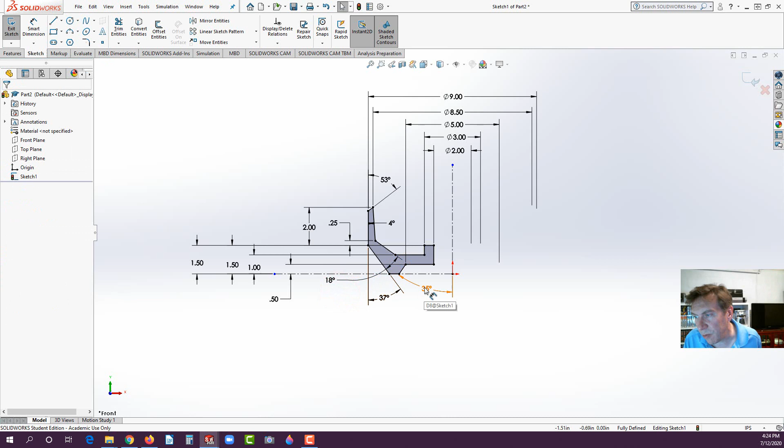All right, let's go ahead and click on the center line. Go to Features, Revolve Boss Base, hit the green check.

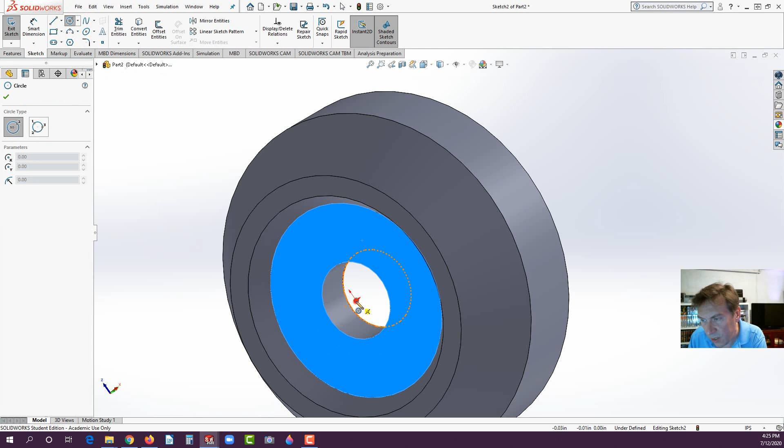Okay, looking good. Now for those holes here, let's select this face and start a sketch. What I'm going to do is put a bolt circle in for ease of use. So we have a bolt circle here of a radius of 2 inches, which would actually be a diameter of 4. And then the quadrants. So let's go to the circle tool, and at the origin, draw a circle and smart dimension it.

Dimension it at 4 inches diameter. Now while we hit escape, select that circle, and right here you could turn it to construction geometry, or check the box over here for construction geometry. So now it's dashed. Let's go to normal to that face. We could go to Features and hit rebuild, by the way, and it'll stay in there. So we're in good shape.

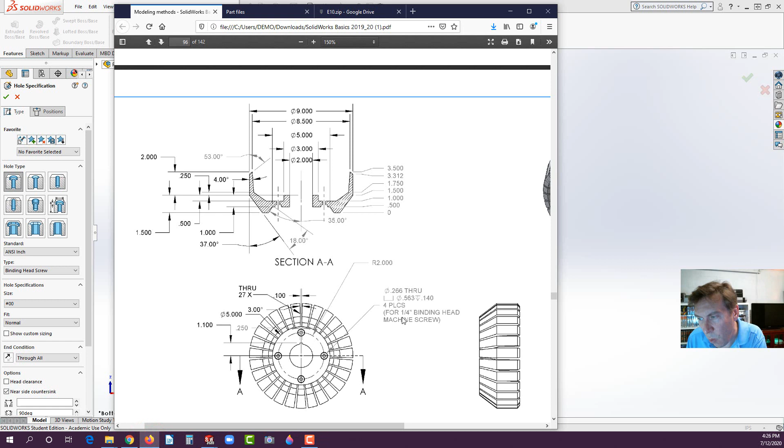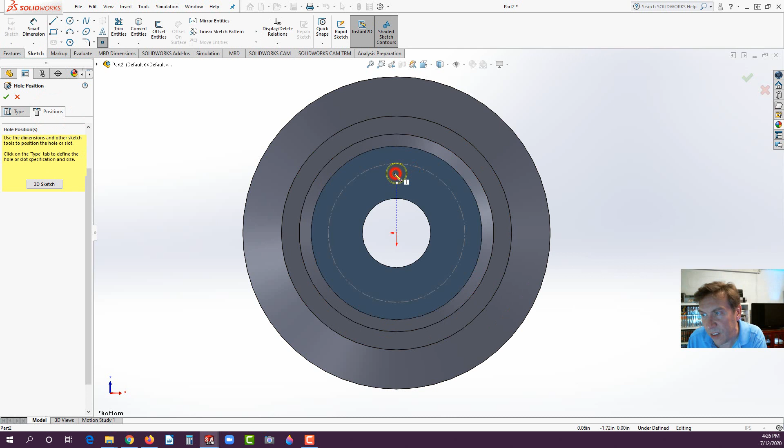Now we could go to Features and actually go to Hole Wizard. It is a counterbore that we're seeking. Let's look at that drawing again - it's for a 1/4 inch binding head machine screw. So we're in binding head screw size, find a 1/4 inch. There it is. The end condition should be through all, and it should be standard, whatever the defaults are. So now we go to position, and we should be able to click on this face and find the quadrants for each one of those.

Now we could do a pattern, but I just want to show you how you could just click and add those holes. Hit the green check. And there it is.

Okay, now select this face, start a sketch, and let's go back normal to it. Now we have to put in the cutouts to make those vanes. So I'm going to start with a center line at the origin. All right, so now as we look here, if we zoom up, we have those cutouts and they follow this pattern. Oh, there's also a keyway that we have to put in, so we can't forget that.

At the base here, it's 0.1 at the base for the width. It's centered, and then it's spread out in 3 degrees. So if we did something like this, where we go off that edge, and let's put in 3 degrees between those two. Ctrl select - oh, I'm sorry, just go to Smart Dimension. From here to here, 3 degrees. And then from the base to the center line, just make sure that's 0.1.

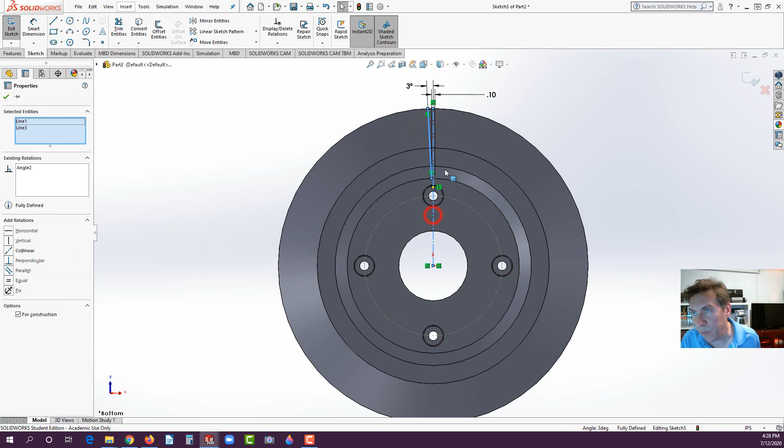Now you could Control select, after I hit Escape, Control select the center line and that line that you want, because we're going to mirror them. Now right here, just put a little straight. Let's go to Features, Extrude Cut, and we're going to go through all, both. Actually, it just needs to be through all, doesn't need to be both, but let's see. Hit the green check, and it cut a little sliver in there.

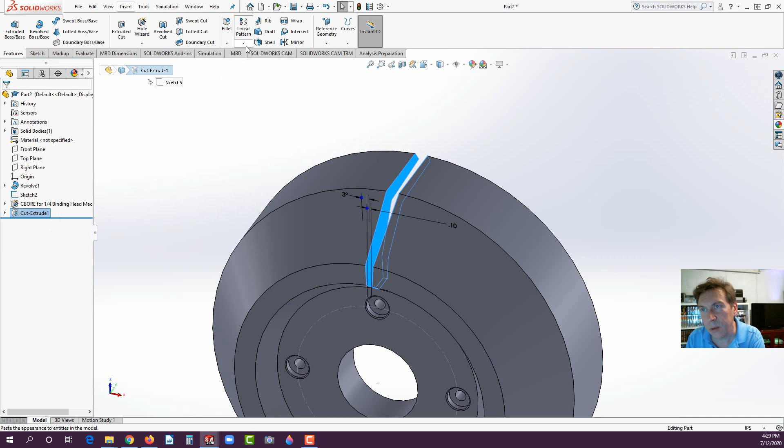Now, sometimes you might have to flip it so it cuts the reverse side, but it did an okay job there. Now we just need to pattern it, so let's look at the drawing, and there's 27 of those. So select that cut extrude, go to circular pattern, we'll put in 27, select the outer face, hit apply, and we're almost done.

Let's put the keyway in, select this face, start a sketch, go normal to it, and get that little - go to center rectangle. Well, let's first draw a center line. Okay, then let's see what the parameters are before we add anything. Okay, so the keyway - the top edge is 1.1 cut out, and it's 0.25 wide.

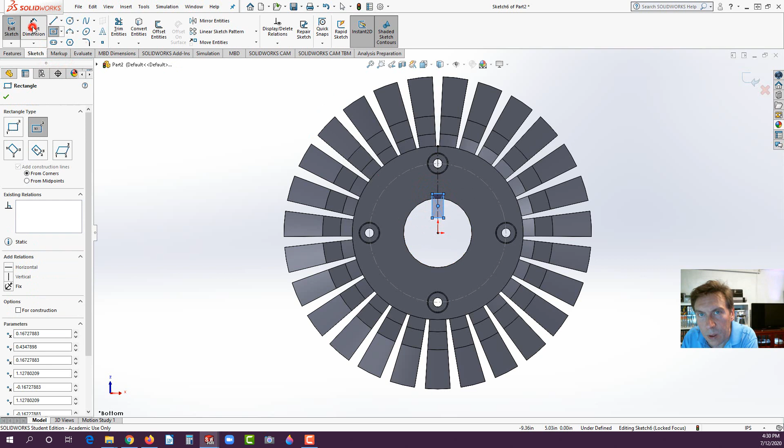So let's get a center rectangle, draw it out like so, dimension it at 0.25 wide, and then from this top edge to the origin, 1.1. And if you want to make sure it doesn't accidentally screw up here, just make it at least 0.5 - something that we know we'll always make sure it goes through.

And go to Features, Extrude Cut, Through All. And I believe that completes this exercise. Now, I would recommend that you make a drawing from this, so we could go ahead and make that drawing: front, section, right, back, and isometric. So I'm going to let you do that. And that concludes exercise 10 and lab 10.